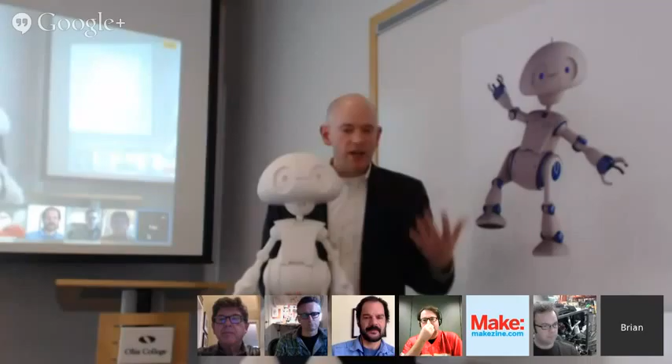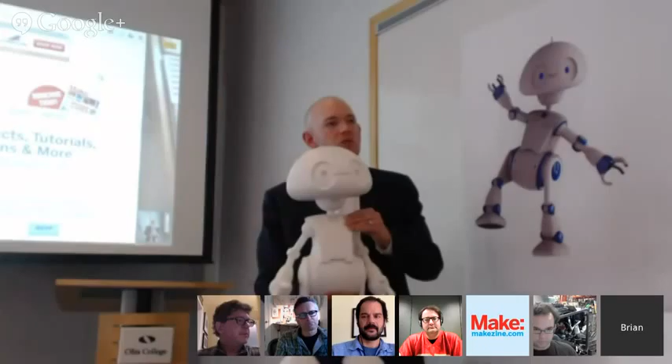But first I want to tell you where this all started. It all started about 10 years ago, where I started thinking, what would a 21st century robot be like? What would it be like to act and interact with this technology? It's my job as a futurist to look 10 to 15 years out and model how people will act and interact with technology. So I started envisioning, what would it be like to interact with these 21st century robots? Robots that were not like the robots you'd find in industrial plants or even in colleges, but ones designed for people, designed to be social, designed to act and interact with people. What would that be like?

So before we had the technology to do this, about a decade ago, we started designing them in science fiction. We started designing them using stories, because science fiction gives us a landscape to talk about the future. It gives us a language. It allows us to imagine what the human impact would be of living with these robots. So I started off on a project working with roboticists from all over the world, talking about how would you build these robots, how would they interact with each other. And so we started writing science fiction stories.

And as a part of that science fiction writing, we were able to start working with an illustrator by the name of Sandy Winkelman, who's here with us today. And what Sandy and I were able to do is start to think about these robots. And Jimmy was the first robot.

But we thought about a lot of other robots as well, and what those robots might be like and how we could use them. We found out that those science fiction stories became almost like the requirements document. So for all the folks here in the room today, you should have a copy of the 21st Century Robot book. That's an early release from Make, which has 4 science fiction stories about Jimmy and the 21st century robots, what it would be like to live with them, how we would interact with them. Every other chapter in that book is a how-to - how to build Jimmy, how to design it, how to put the sensors in. That's really what we're doing today.

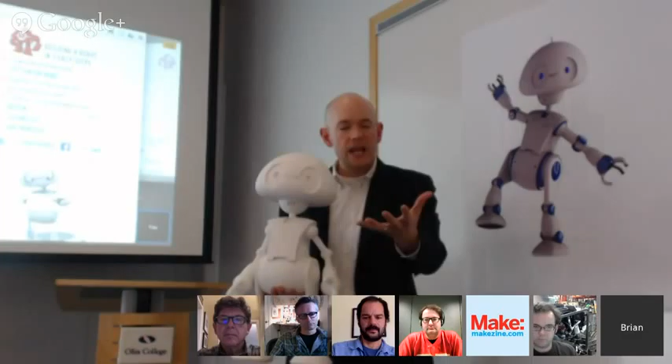But let's go back to the science fiction part. As I said, Jimmy and the 21st Century Robots were born in science fiction, but not only written fiction, also visual fiction. For those online, you can go to 21stcenturyrobot.com, the 21st Century Robot project site, and I'm sure they'll put up the link. You can download the book for free to see not only the short stories but also the illustrations. That's why I'm happy to have my longtime collaborator here on the Robot Hack with us today, Sandy Winkelman. We've asked him to talk about what it was like to work over the last 10 years coming up with these robots and designing them through illustration.

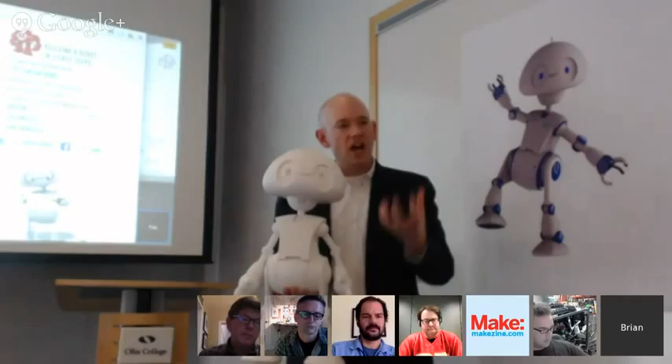Hello. Yeah, like Brian said, he's been working on this for 10 years, and we've been friends for quite a while, and we've both got a mutual love for robots. While he was doing his thing, I was also just painting robots in a post-apocalyptic world. I was interested in what robots would want to do when we're all gone, so I used to draw paintings of them on roller coasters or walking dogs and things like that. But when I painted these robots, I never painted anything realistic - it was just for fun, more like stick figures.

Then Brian created the science fiction and wanted an illustration design for Jimmy, so it was up to me to figure something out. Based on his writings, I knew he had to be short, I knew he had to have big hips, and he had to be non-threatening. He had to walk like a duck.

As a kid, I really loved the movie E.T., the extraterrestrial. I used to be able to draw E.T., and I remember watching the documentary as a kid on how they designed E.T. and all the different iterations they went through to create him. Because in a lot of ways, E.T. had to have the same characteristics as Jimmy - he had to be non-threatening, friendly to kids, short, and still be able to function in a world that is ours. So I kind of piggybacked off the designs of E.T.

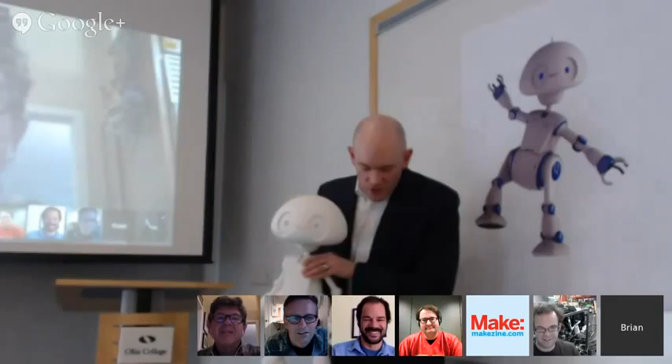What was the source of the name Jimmy? So the idea behind the 21st Century Robot Project is that every robot has a name, right? Every robot needs to be an individual because it's built by an individual. Originally when we were brainstorming the name, we wanted something as non-threatening as possible, a name that would fit this little guy. When you heard it and somebody said, 'I want to introduce you to my robot, Jimmy,' we kind of tried to pick the most improbable name possible. So we thought Jimmy would be great.

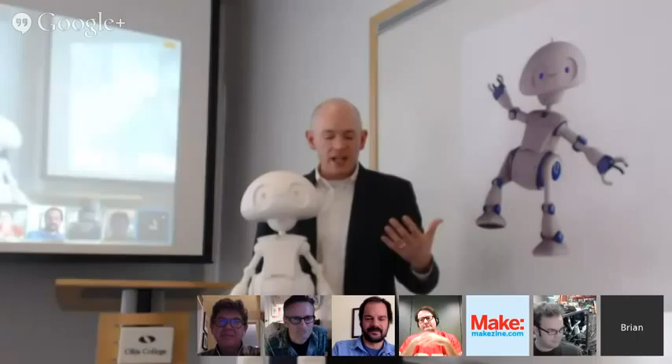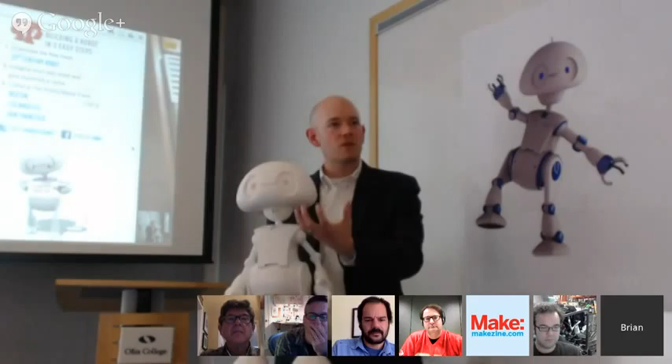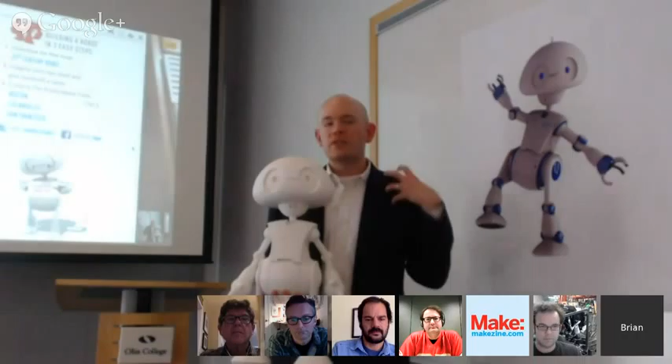Speaking of bringing Jimmy into the real world, Sandy and I worked for quite some time going through and imagining what these robots could look like and how you could live with somebody like Jimmy. But then it was time to take it to the next step. We were getting ready for the World Maker Faire where we were going to launch the 21st Century Robot Project, and start talking to people about it, about these robot hacks and getting everybody involved. So we needed somebody who could take the illustrations and the fiction of Jimmy and literally bring him into the real world. We're really fortunate today to have here in person Wayne Losey to tell us about what that process was like, how you could take something that was literally born of people's imagination and actually make it so that I could stand here in front of you today.

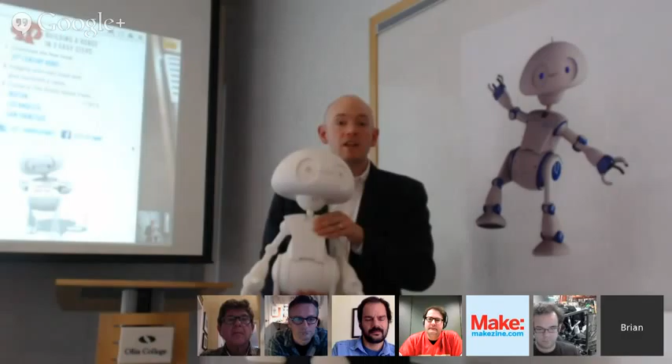This was actually what Wayne created, printed on a hobby 3D printer, and Wayne actually brought him into real life. So please give a round of applause to Wayne Losey, and he's going to tell us about that.

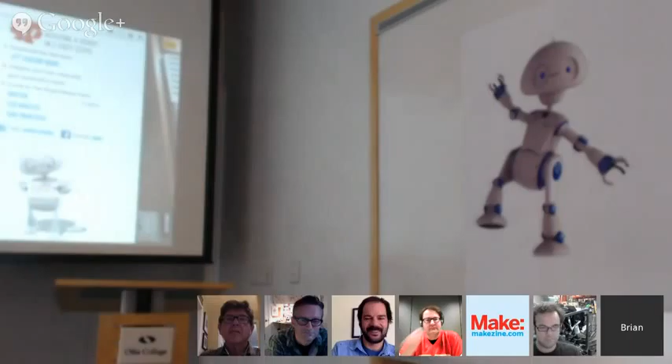So this guy was a challenge. Basically I came onto the project about 2.5 months before Maker Faire. At this point, I had had no direct experience printing from a hobby printer. I had sent prints to people to be done before, and I had a ton of experience using service bureaus like Shapeways and prototyping services. I've been using prototyping as a tool for the past 20 years in the toy industry. So in some ways, I leveraged all that past experience to put Jimmy out — I think it ended up being about 1.5 months from the time I started the files.

But Jimmy was built in Rhino, a really great solid modeling package. When I was building him, part of the challenge is you can see he's pretty big — in fact, we wanted him to be like 3 feet tall when we first had the discussion. The challenge is putting him into small enough pieces that we could actually build him on a hobby scale printer. His head, as you can see here, is quite large, and it's built in 2 pieces that needed to be hollowed out. Just laying up the pieces so that they could fit on some of the hobby scale build platforms was a challenge in itself.

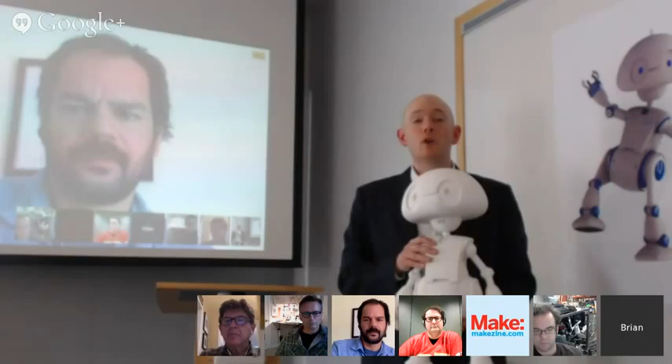It will be available eventually. I would say not yet. That's really one of our goals, and the goal of everybody who's been involved in this project, the people who you've met and the people who you will meet, is to have versions of this so that all the way down to grade school level, when it comes to just the small little version that Wayne showed, that we can get lots of kids and lots of students designing robots in their imagination first.

That's actually part of our manifesto, which I'll talk about at the end. We'll be developing and sending out first the 3D designs, and then the physical, mechanical designs that come later. You'll go to both the Robot Hacks website and the 21st Century Robot site, where we'll put those so you can print them. We really want to encourage as many students as possible to become part of it. Probably as we get into 2014 is when we'll start releasing those.

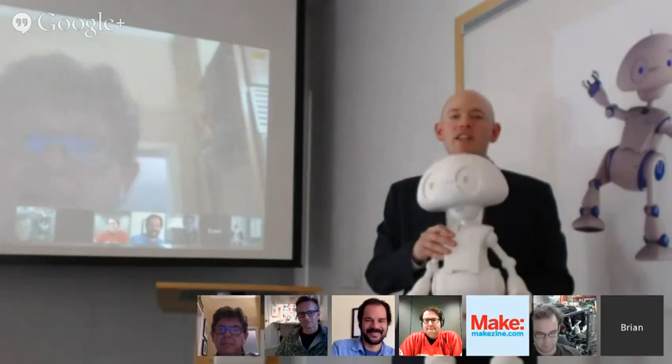A lot of them came up to me afterwards, and Wayne was coming down the next day, and they wanted to know how I possibly got that done. That's impossible, you could not have pulled that off on a hobby printer, they said. So very quickly, Wayne became like this absolute god of 3D printing because people didn't believe he could actually get it done. I maintain it's because Wayne is incredibly talented in design and work like this, but also because he didn't know that he shouldn't be able to do this on a hobby printer. He didn't know you weren't supposed to be able to do it, but he actually got it done.

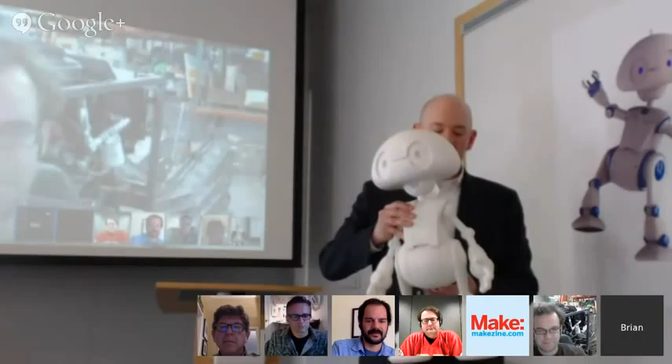So the next step in the 21st Century Robot process is coming here to Olin College. We're now collaborating with the folks here, and we have teams of students and makers starting to build the insides of Jimmy, actually getting him moving and building his guts. We're very lucky to have Gui Cavalcanti on the broadcast today, and he's going to talk a little bit about what he's going through and what it's taking to actually build the insides of Jimmy. So everybody please welcome Gui.

Hi everybody. It's funny because Brian and I were on a broadcast before, on Big Brain Theory on Discovery Channel, where we made pancake robots together. So it's a little bit different this time.

I want to talk a little bit about what's going on with the mechanical design process of Jimmy. Let me share this presentation with you guys. So let's talk about how robots are designed. Is that visible to everybody?

Yes, cool, okay. So before we talk about robots, let's talk about humans, right? Because the whole idea is that Jimmy is humanoid—not human, but humanoid. And it turns out human beings are actually really good at a lot of stuff that robots aren't. Here are a couple of examples.

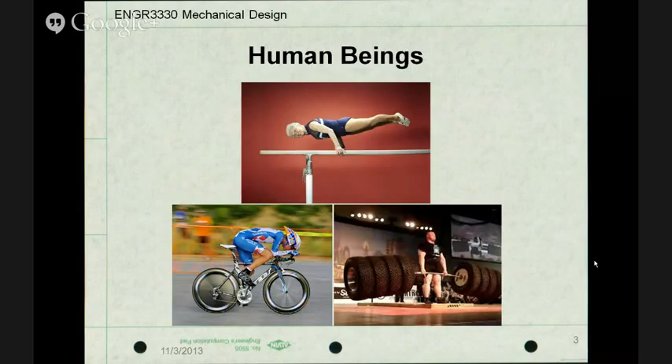The top right, this woman is around 75 years old, and she's balancing. We have a cyclist here hitting something like 30 or 40 miles an hour without working too hard. And we have a deadlift of 1,100 pounds plus. So when you actually look at the capabilities of human beings, it's pretty impressive.

We can do a lot with our bodies when we really try. We've jumped 8 feet in the air. We've hit 25 miles an hour on foot. We've done an 1,180-pound deadlift. We've ridden bicycles at 83 miles an hour. And we can throw fastballs over 100 miles an hour. This is basically ridiculous when you think about how you can optimize the human form, given the fact that it is so general. There's a lot we can do.

So when it comes time to building humanoid robots, all of a sudden we're left with this idea of, well, all of our tech really isn't that great yet. We don't have the equivalent of muscles. So if we want to be able to walk and move around, how do we build this?

If you're life size, you have to spend a lot of time working on actuation. You have to spend a lot of time designing custom linear actuators, rotary actuators. Asimo was one of the first humanoids to really walk, and then you started having robots like Robonaut on the left, Petman on the right, that started evolving the space.

And then we really started getting interested in building small robots. But here's the problem. When you build so small, you start running into this deal where the laws of electromagnetism don't really want you to go smaller than a certain size, because at some point you lose the ability to have motors that generate enough power to move joints for their volume. That's not something we've solved as a species yet, and physics may not allow us to solve it in this particular case.

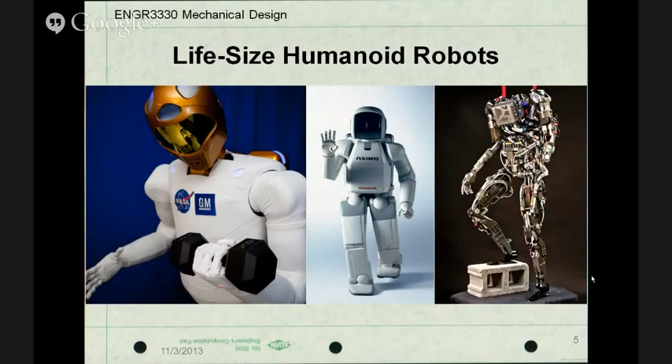So Jimmy is actually in between the big robots and the really small robots. And Jimmy's pretty artistic compared to especially these small robots. These small robots don't really have much sculpting, they're just the size of their motors.

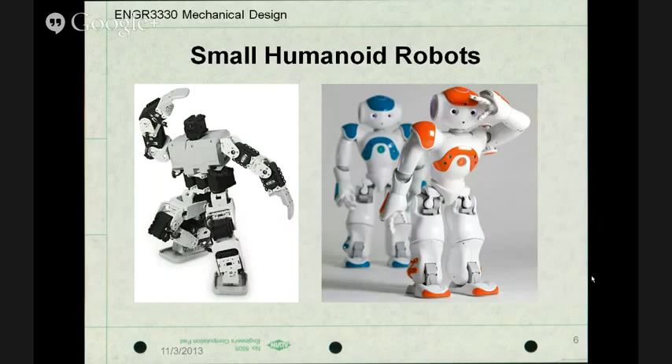So when we go to design, now we have to say, well, the links are just a little bit bigger than the motors, and now we have to figure out how to flesh out this design process. So this is a little quick study on what it's usually like. Usually you decide on the size of your robot, and you estimate as best you can what all of the little bits and pieces of your robot weigh.

You select the desired motions, right? Are we going to do jumping jacks? Are we going to walk? Are we going to run? Are we going to do push-ups? Given those motions, and given those weights, and given the link sizes, you characterize how fast each link needs to move and how much torque it needs, and then you kind of pick the motors that fit that.

Except usually what happens is you pick motors that fit your ideal, and then you realize all of your estimates were wrong. So you actually have to start back into this cycle where you're like, all right, let me estimate the link weight again, then go through the motions again, then characterize the speeds and torques, and then does my motor still work? Usually the answer is no.

So then you kind of keep going, right? And you change your design process to, okay, can my motion scale back a little bit? Can I not do jumping jacks, but instead just kind of wave my arms in the air and step to the side? A little bit different, right? And then eventually you may decide, well, I can't really build a robot this size, let me scale up or scale down.

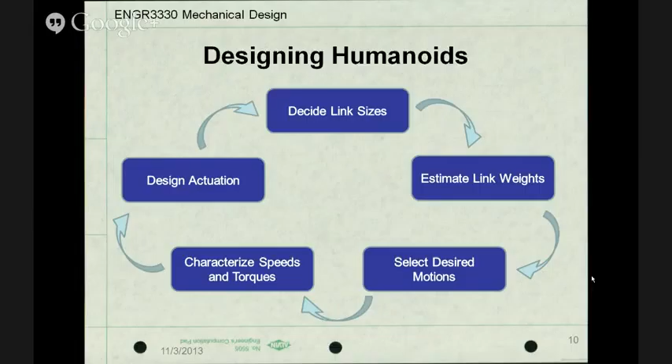So that's the messy process that we're in right now. It's like, we have to make this real using technology available today. So what is the solution to this many-faceted problem that will allow us to get here?

So right now, one of the things we're blessed with is that we have a lot of the specs already. We have how long the limbs are, we have the rough shape of them, and we can skip this step of, well, how big does a thing need to be to be exactly humanoid shaped? But one thing we do need to understand is, given the shape that we have, how much does it weigh, so we can estimate how much torque, how much speed, how big of a motor we need everywhere.

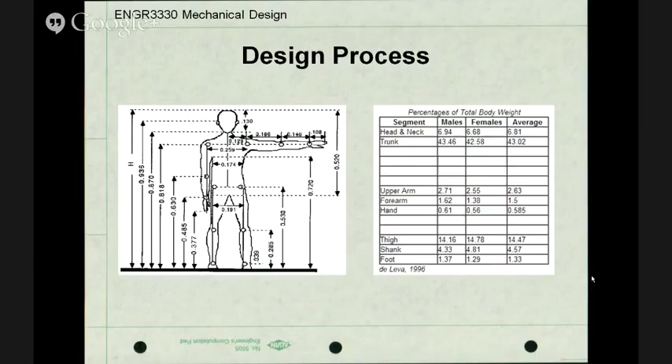Then we have to decide what joints do we actually want, right? So it's not just about how much force everything takes, it's actually about what do you want to actuate. Is it okay if Jimmy can't bend at the elbow, or can't close his hand?

That's an open question. There probably need to be a whole range of Jimmys, right? So maybe there's one that just kind of toddles around, and maybe there's one that's fully articulated and can grab whatever's around it and hold it up to eye level. But choosing how many motors, how many joints is actually a pretty critical part of figuring out how much it's going to cost, how big it needs to be, what's even achievable.

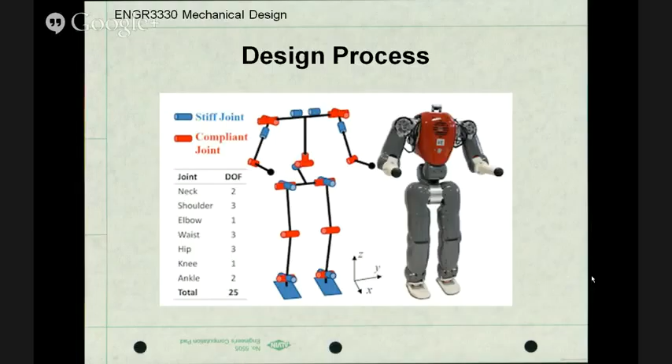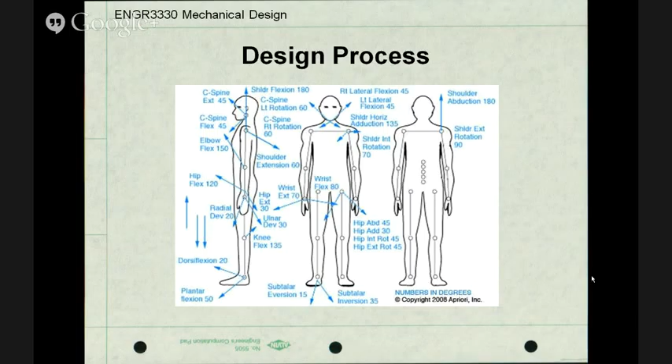So once we figure out how many motors, we decide, okay, how much do those motors have to move? This is actually pretty critical because it's not just about getting a motor that moves that much. It's about designing a mechanical structure for the robot that allows that much range of motion, which gets pretty hideously hard pretty fast. So one thing we did very early on is we said we're not gonna open this design space up to every possible solution.

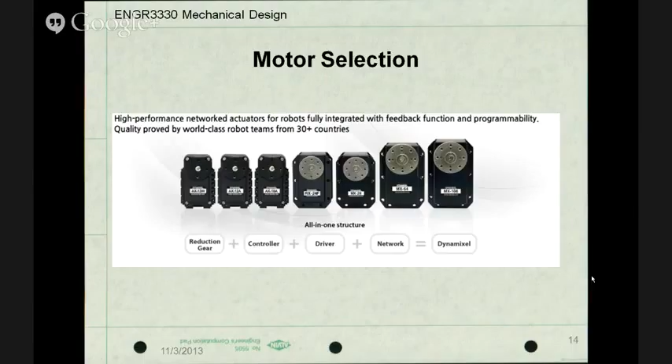Because if we did that, we'd be here for years before we had a functional robot. So we decided early on, you know what, we're going to pick these motors that are used for humanoid robotics all the time, these Dynamixel motors from Robotis. The nice thing about them is that they have an integrated gear train, a motor controller built into them, a really nice motor, and a lot of standard output sizes that click together.

One thing that's really cool is that they actually daisy chain. And for everybody at home who's about to start building this kind of robot, once you realize, oh hey, I have 6 motors in the leg, and now I need 6 motors worth of wires to go through the hip, you start realizing, oh wait, this is really hard.

It turns out 75 to 80% of industrial robot failures are not actually mechanical in nature. They're in wires ripping out of their sockets. It's silly, it's stupid, but you have a lot of people who say, I've designed this beautiful mechanical thing, and oh yeah, now I have to slap some wires on the side and hope that it still works. So these motors make sure that you don't have to go down that really messy path of doing all that wiring and figuring it out. So that was kind of a blessing for us as well.

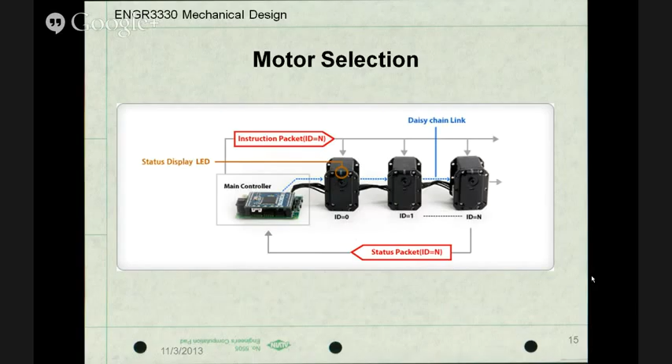But now, given these motors, how do we make it work, right? So near the start of the whole process, we had the 3D printed Jimmy show up. Everybody got to play with all the parts, and everybody started freaking out a little bit. Problem was, all of these parts, they're beautiful, right? But they're really small compared to the actual motors that we're capable of using.

So this problem quickly becomes one of not only what speed, what force, what torque do we need, but how do we fit these physical motors that have a certain envelope into this build volume? And this isn't a problem just for Jimmy. This is a problem for every humanoid robot known to man, because it's actually really hard to get motors that are high enough power and small enough to fit inside these joints while still doing appreciably cool things.

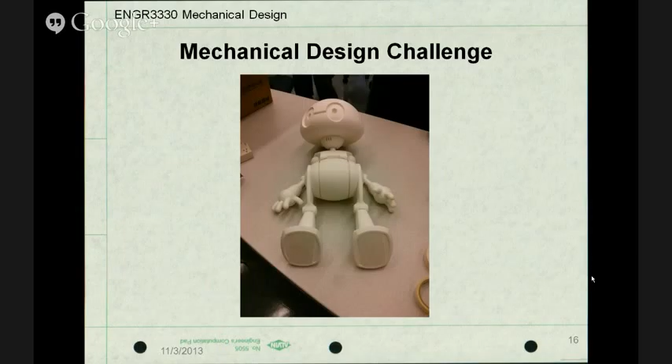So we're in this mechanical design class at Olin College, and these guys are having an amazing time working through all of the problems that arise in trying to package these motors into these very small volumes. So what they've been going through over the past month or two is they've been explicitly trying to design joints with gear reductions, with belt reductions, with linkages, with cams, to see what works. Like, how do you make a wrist that moves the way it should in the volume that it has, using parts that are available to engineers, parts that you can 3D print, what have you.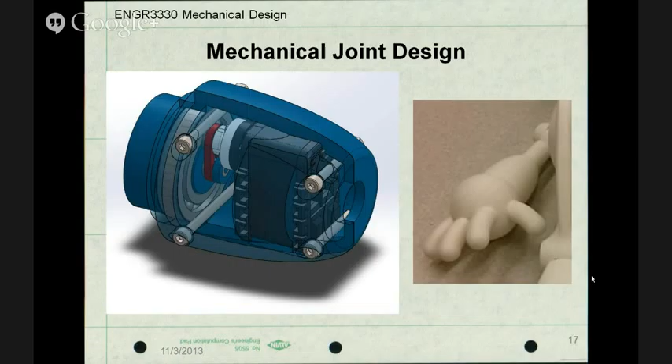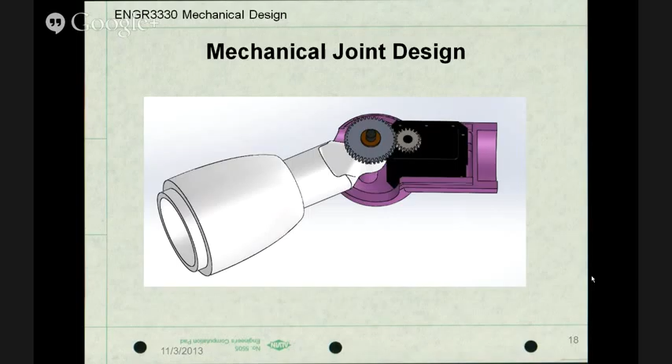We keep moving through the design space, and what we'll basically find is, maybe this upper arm can't be as narrow as it is right now if Jimmy's ever going to be able to hold a thing in his hand. So maybe we need to make it just a tiny bit fatter, so Jimmy puts on a tiny little bit of weight so that a motor can actually go into the upper arm.

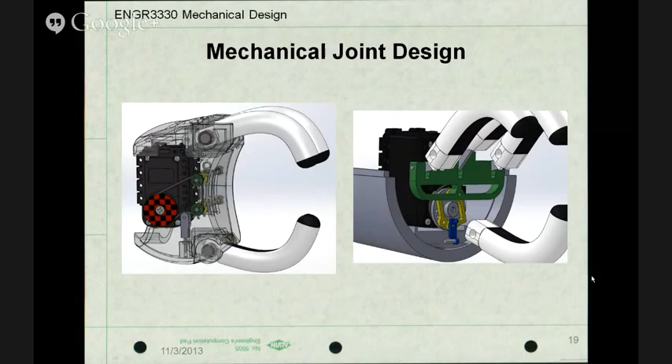We have a whole bunch of teams working in tandem, exploring this design space together and presenting in class on what they've found. On the right you have a hand built with linkages. On the left, a hand working with a belt drive that's more of just a band. How do you make a wrist that closes around objects and doesn't get overdriven if you accidentally clutch something too tightly? Can you build in a clutch of some kind? This is the kind of thing everybody's working on, and we have multiple parallel teams attacking the problem from different angles to see what the best solution might be for all of these joints.

So this is another example, right? These are 3 different versions of Jimmy's knee. The one on the left is a spur gear reduction. The knee, by the way, is one of the hardest joints to design. Human beings can generate torques of upwards of 150 to 200 foot-pounds on their knees in a deep squat. That's basically equivalent to any sedan sold right now, the torque at the output of the transmission of most family-sized sedans. So the knee is actually really difficult to design, and you see lots of gear reductions in all of these knee designs.

The spur gears on the left are a 1 to 3, 1 to 4 reduction. In the middle, you can see a worm gear reduction from the Dynamixel motor, something more akin to a 15 to 20 to 1. And on the right, you can see some teams experimenting with the belt drive. Each of these has changed volume slightly in some ways. I think the one in the middle hasn't changed volume much at all, but getting motors to work inside this volume is really difficult. That's something the teams are exploring, trying to figure out what the right transmission style and reduction is, so that once it's done, we can release all this data and say, this is what we actually found to work.

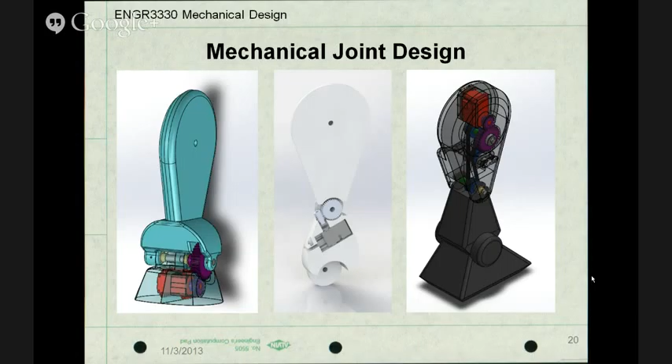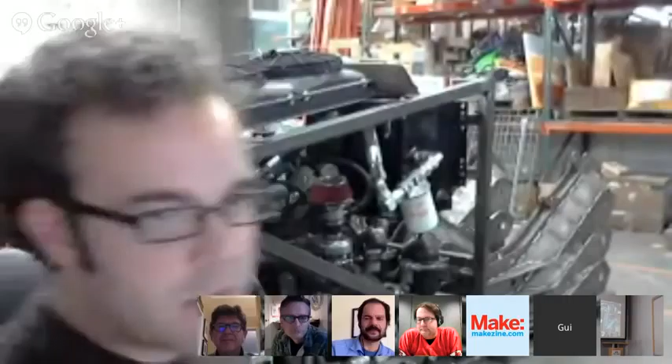So, time for a fun aside. I'm not just building Jimmy nowadays. Jimmy is actually the smallest thing I've built in a very long time. My current project is this—I don't know if you guys know of Project Hexapod, Stompy, but that's what I'm working on now, and what you can see behind me. Those are the robots I work on. This is a giant 100 horsepower power plant with a 600-pound engine in it, and over there are bits of legs. This is all open source—both Jimmy and this giant robot will actually be open source, probably around the same time.

But that's fun, right? How do you do this robotics research? How do you figure out how to fit motors into these kinds of robots? How do you make this actuation work so that you can make really, really cool stuff? And how do we teach all of you guys how to do this? That's really what all of these projects are about—exposing people to robots, teaching them what the challenges are, teaching you how to overcome those challenges, and starting to get into this process.

So that's the inside of Jimmy. It's still being fleshed out, still kind of messy, but I'm working on it, and getting there. Thank you, Gui—let's give some applause to Gui.

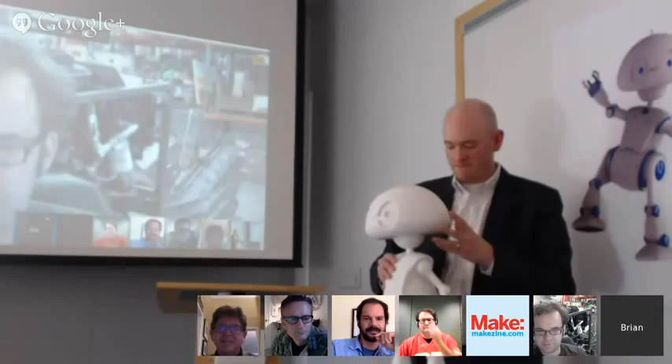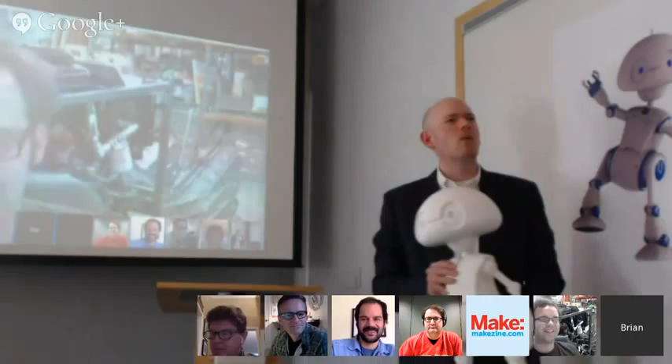It was very funny when I first met Gui for the second time. They said, 'Oh, you've got to meet Gui, he's going to be building the insides of Jimmy.' And I said, 'Oh, that's great.' We were in the lab here at Olin, and I walked up and thought, wait a minute, I know that guy, I met him on TV. I walked up to him and we both recognized we had met each other, and there were cameras around us—we had actually met on a reality TV show. This doesn't happen too much. I said, 'I know you.' He said, 'Yeah.' I said, 'From TV.'

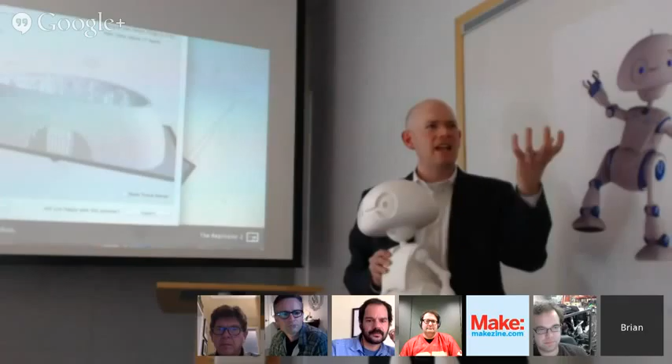For folks who know robots and the history of robots, Rod is this incredible figure that moved robotics forward at the end of the 20th century. He took it from big AI and Asimov-style robots into things like Roomba, which is what he's best known for. I was on a panel where Rod was talking about Baxter, his new manufacturing robot, and I was talking about Jimmy, which I think was the fulfillment of a dream, to actually have one of these amazing thinkers, and he's still an amazing thinker.

We were talking about it, and he became a fan of Jimmy. I told him we had this crazy idea that we wanted to open source Jimmy, and get as many people building it as possible. He said, 'I have a guy you need to talk to, you've got to see this program up at Olin College.' He hooked me up with Dave, and I told Dave all about the 21st Century Robot Project and these highfalutin ideas about it being open source, giving away all the AI, all the designs, everything, and wanting to really partner with somebody. And there's this silence on the line.

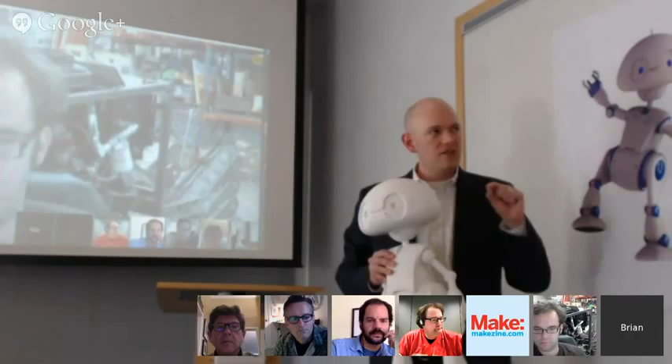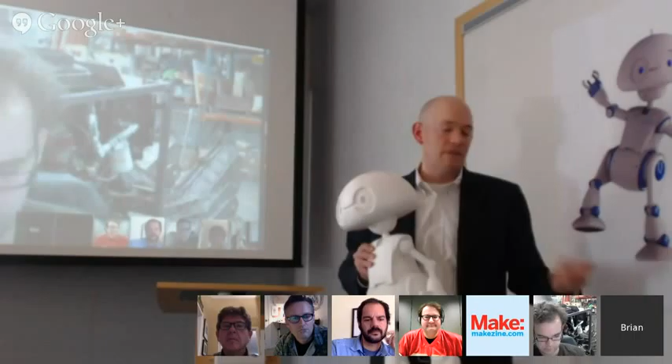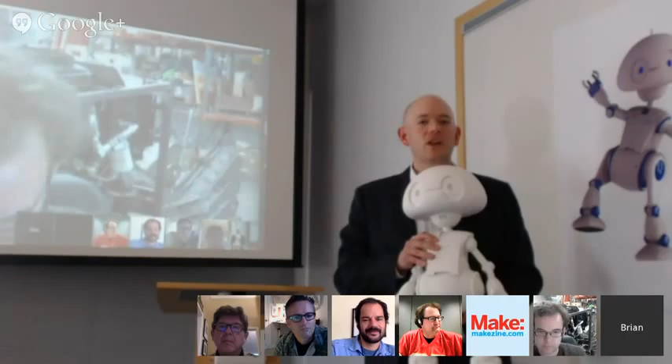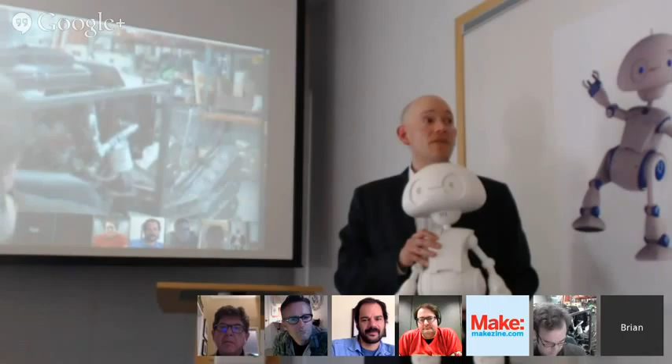If you've ever given a pitch, you realize that you have failed. I thought he may have even hung up because he thought I was crazy. I have no idea. Then I hear this little laugh and chuckle, and he goes, 'Brian, I got to tell you what I was doing. I just came from lunch where I was talking with my colleague, and we were looking for a project we could start building around biped robots.' He said, 'So can you give me a couple days?' I said okay, we hung up, and I didn't hear from Dave for a while. Then he calls me back and goes, 'Yeah, I think we can build Jimmy, and I think we'll have him done by November or December.' It was like a dream come true. It was absolutely a dream come true.

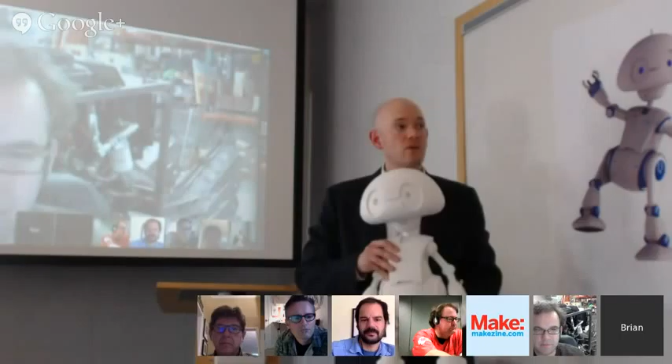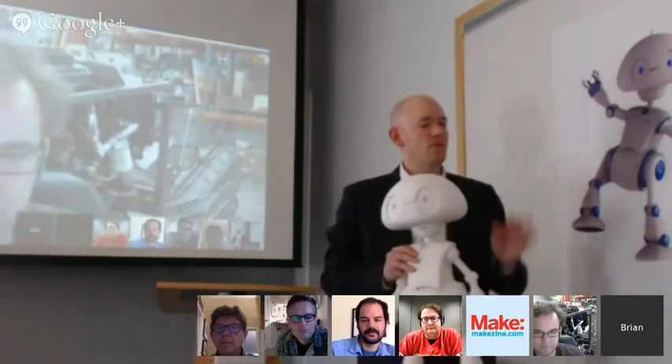When we came here and got to visit the work being done at Olin, and got to meet Guy again and see the work here, it's amazing, the stuff that's going on and that Dave and the team are building is absolutely incredible. I wanted to bring Dave up to talk about the process, how we're getting Jimmy to the point where we can release it to everybody, but mainly getting Jimmy to the point where he can walk and balance. I know Dave's dream is to have him balance on one foot, but that'll be coming soon. Please welcome Dave Barrett.

Hi, I'm Dave. I have one of the best jobs on planet Earth, I get to teach engineering here at Olin College. I'd like to welcome you all to the campus and to the Jimmy program. Olin is a very unique college, probably the first maker college on the planet. Our curriculum is centered around a design-build philosophy, where we figured out early on that students learn much better by building than by listening to some old guy like me talk for two hours. So our curriculum has this constant thread of design, make, test, break, over and over again. This semester I'm teaching mechanical design, and I have 40 of the best young engineers on the planet in the class. I was sitting around at the end of the summer thinking about what we should build.

I have a couple of things under development. We're looking at big agricultural robots. We're looking at undersea robots.

And Brian calls me up out of the blue and he says, I want to build a humanoid robot. My first thought: he's freaking crazy. Does he have any idea how hard this actually is?

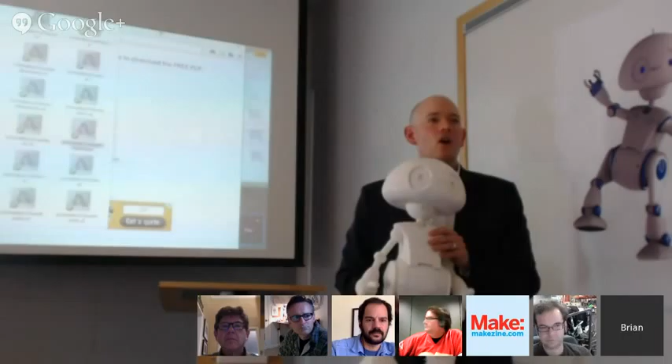Because we kept saying, your robot's so 20th century, so last century, you need to come up with a 21st century robot. And he said, well, what defines a 21st century robot? So we came up with this manifesto. The idea is that a 21st century robot is imagined first, that it starts in the imagination. With us, it started with science fiction stories and Sandy's drawings, but everybody can design a robot because everybody can imagine a robot.

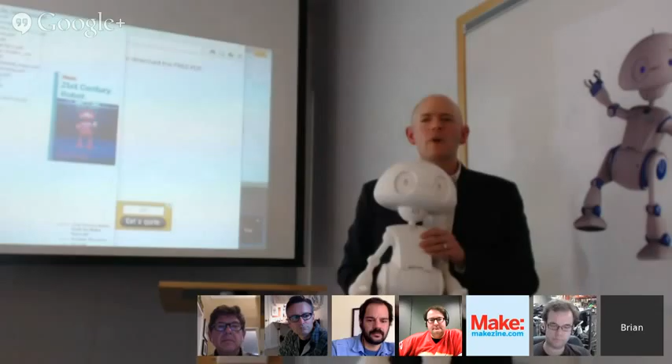And then the second part is that it's easy to build. We've reached a point with our technology, with 3D printing, with shrinking computational power, with the Make movement, and with open source design, that everybody should be able to build a robot, and we should be able to make them easy to build. That's one of the things everybody involved really believes in, that we're doing this so we can put it into the hands of everybody.

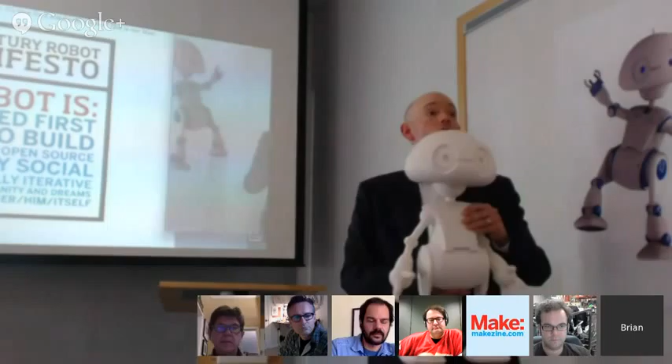Number three is that it's completely open source. So the 21st Century Robot Project's 3D design files are open source, meaning you can have your robot look like what you want it to look like. That's what I tell everybody. Your robot doesn't have to look like Jimmy, although he is cute as a bug's ear, but every robot should be individual. You should be able to design what you want your robot to look like.

That's why we're giving away the design files, as Wayne mentioned. We're going to put them out there, and as we do other design files for other 21st century robots, we'll put them out there too. But then also, we're going to open source the mechanics. So the great work going on here at Olin College with Dave and Guy, once we get those designs out, we're going to release those on the web.

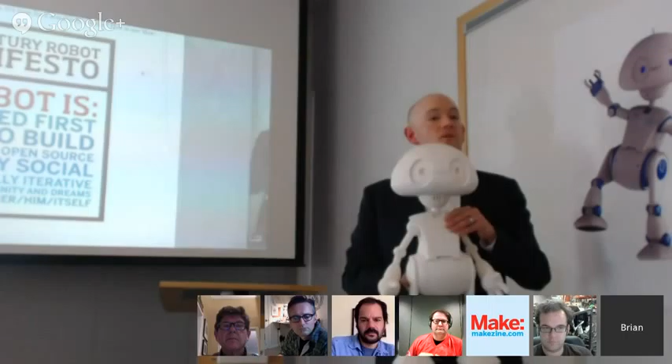And then finally, we have the AI, being built at USC, at the robotics lab there. Unfortunately they couldn't be with us today on this hack, but we'll have them back at another hack because the work they're doing is absolutely amazing. They're creating a real AI that they're going to open source, that's app-based, meaning you can write little apps for your robot and download them. So think about your robot, from a software standpoint, like a smartphone that you can personalize as much as you could personalize a smartphone. That's the idea behind it being completely open source.

And then next is that these robots are social. We've got lots of people designing robots to do amazing things, to do surgery on people, to use them for agriculture. Our idea with the 21st century robot is that it's there to be social. It's there to act and interact with you, and with other robots and other devices.

And then finally, it's intentionally iterative. The idea is that everybody should be able to build not just one robot, but many robots. Why would you only build one robot when you could build many? And they're filled with our humanity and dreams, that human beings build these robots, we imbue them with our dreams and our sense of humanity. And finally, that they're thinking for her, him, and itself, meaning it's got real AI, it's not a puppet, it's really there to interact with you. That's why our motto is that every robot has a name, because every robot is built by somebody, and every robot should be an individual, there to act and interact with you.

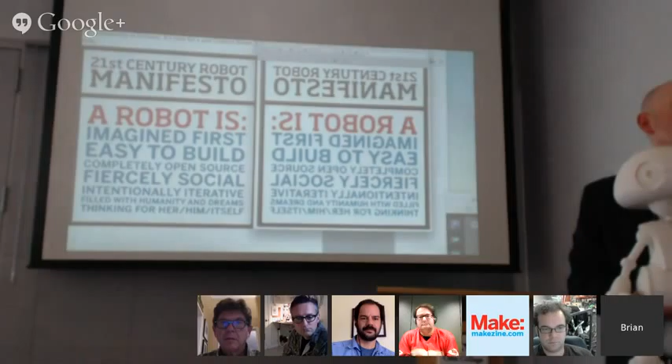The whole idea is that we don't know what a 21st century robot is. Ultimately, we don't know, but together we can all find out. Together you can tell us what you think your 21st century robot could be and should be, and then send it to us. We'll put it online and also put it into the book and give people credit, because I think that's the future we're moving towards—a world filled with robots.

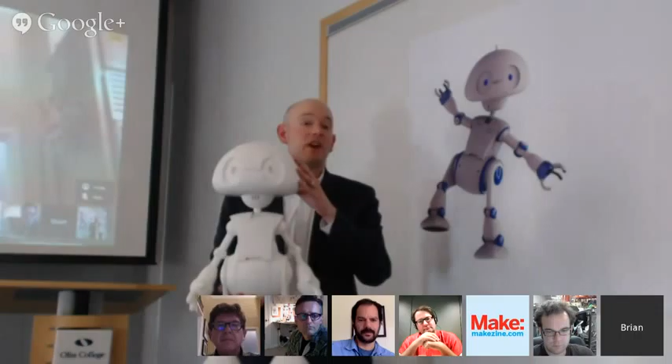So the head is very important. If you go and read the very early short stories about Jimmy, it actually talks about how he walks—he kind of walks like a duck, as Sandy said, and kind of wobbles. We were laughing that the science fiction stories are really the system diagram, the early requirements documents if you will, from an engineering standpoint. Really what Dave and Guy are doing is just building to the requirements documents, because he's always had this funny little waddle of a walk where he uses his head for balance.

Brian, this is Stuart. What kind of work are you guys anticipating doing on speech and the other dimensions of humanoid behavior? Well, speech is something we're right in the middle of discussing, and the folks from USC, Maja and Ross, will really get into that, because they are very much into affective computing and emotional computing and being able to act and interact.

Ultimately, as we say in the manifesto, Jimmy is designed to be social. How he gestures, what he sounds like, what his lighting scheme might look like, how he expresses himself, we think is really important. But what we're trying to do is create a platform of sounds, lights, and expression in multiple voices, because every robot has a name, so every robot's an individual, so every robot should have his, her, or its own voice. We're marching to that level of requirements.

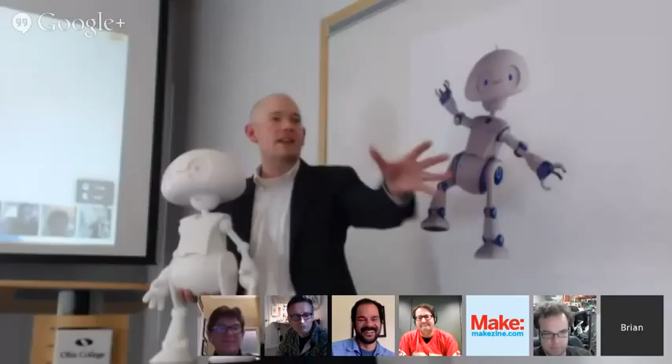That's great. So, if there's questions from our live studio audience—live studio audience? Hey, when we say live studio audience, you have to actually make like a live studio audience. So, live studio audience?

Any questions from anybody in the room? You didn't think you were going to get called on, did you? Nope, I think we're clear from here in the room. We're going to have quite a bit of Q&A after the live broadcast here at Olin. Any other questions? That's it from our side here.

Thanks again, this has been fantastic. This is one of my favorite presentations that I've been part of, and the exciting part is that it's just the start. So this will be a fantastic journey that I can't wait to continue to watch develop and turn into something really, really amazing.